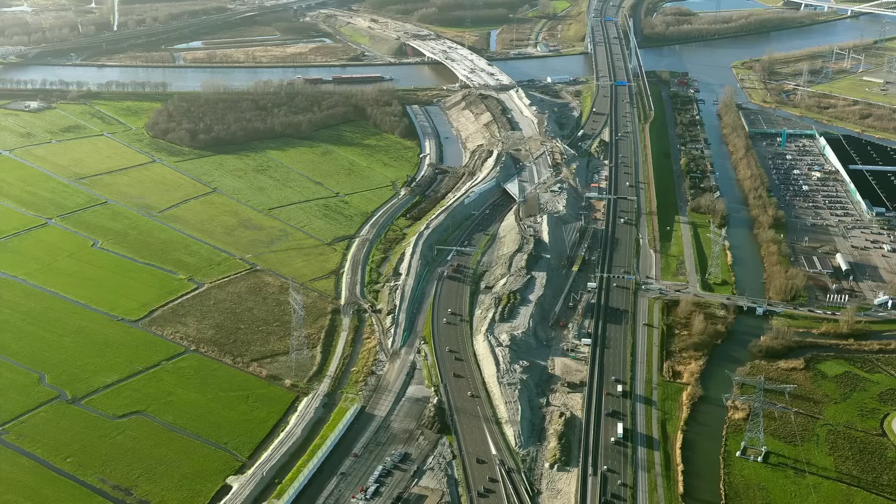We are the Netherlands. We are a car-addicted country. We build motorways, 6 lanes, traffic controlled. We are, just as the US, a car-dominated society. We have to deal with people driving cars. But still, we try to aim to build equitable, livable, and attractive cities for everybody. And when we plan, we try to plan for people, for human beings. And sometimes you have to deal with the fact that they drive cars, even in the Netherlands.

We speak a different language, Dutch, and that makes it easy to do a Google image search. So what I did, I put in the word fietsers, which means cyclists in Dutch. This is what I get if I do a Google image search of fietsers: happy people, upright bikes, enjoying themselves. So when I talk about fietsen in the Netherlands, this is what people have in their minds.

Now I'm going to Germany. Radfahren. I'm getting different images: a more sporty person, a road cyclist, and seniors on e-bikes on holidays. So when I go to Germany, where I also work, when I talk about Radfahren, cycling in German, I have to take into account that my audience has a different image of what I'm trying to convey. Because as a planner, I'm pushing for everyday cycling, for everybody, for the Dutch fietsen.

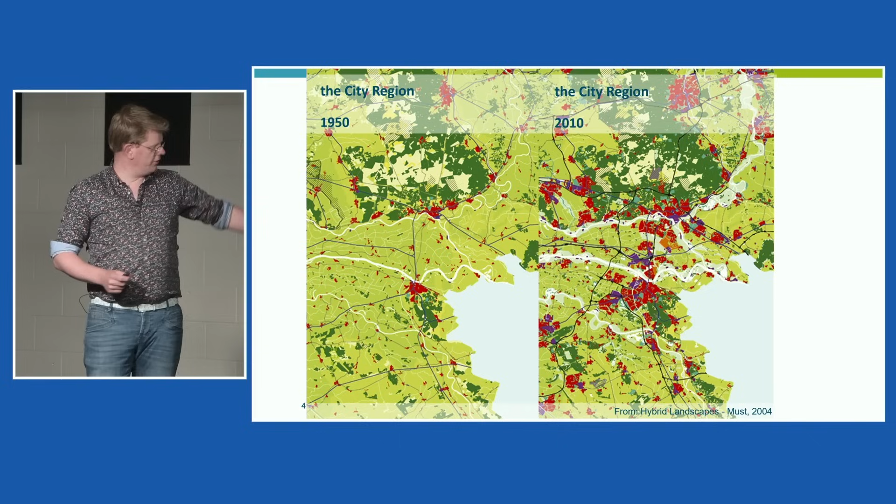One thing. Second thing. I come from the region of Arnhem-Nijmegen. It's in the east of the Netherlands. And you see that urbanization happened. In the south is Nijmegen, that red blob, a Catholic city. North, across the rivers, is Arnhem, a Protestant city.

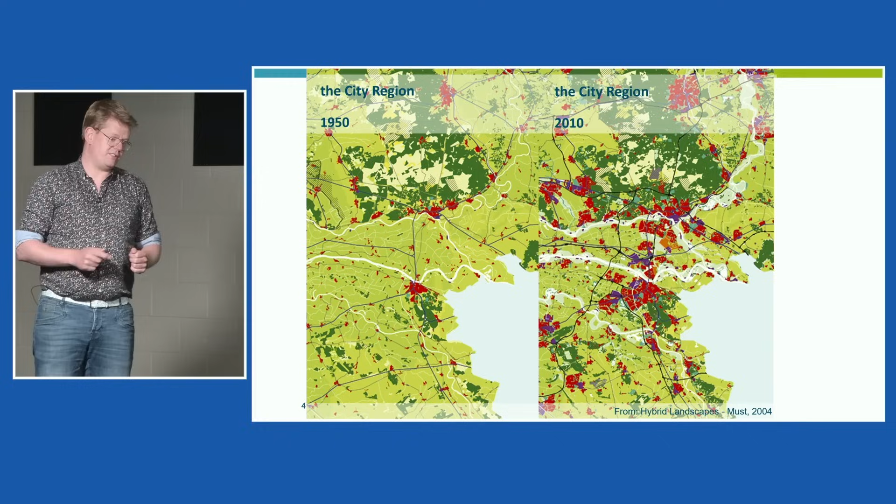I used to work as a civil servant for the region until 2017. And the joke was always that in Nijmegen, the Catholic city, a funeral is more festive than a wedding in Arnhem. There was always competition between the cities. But we had to work together, because what you see is regions grow together, communities grow together, and you want to create connections between those communities to create strong communities.

So we developed a cycling network for the region. And the interesting thing is, we talked through this with politicians, and they said to me, 'What do you want to do?' 'I want to develop this cycling network.' And I said, 'Okay, that's interesting, but that's spaghetti. There's no priority. It's such a lot of things to wish for.'

And one of the things we pushed for in 2008 in the Netherlands, in this region, I said, 'Okay, we're going to focus. We're going to make a few cycling connections really good.' So we said we're going to develop cycling highways, creating connections between cities of such good quality that you really would like to ride there, that you really would like to fiets there, and that they are suitable for everybody, from an 8-year-old to an 80-year-old, from 8 to 80, all ages and abilities.

So we were pushing for fietsen. This is the cycling highway we built. This is relaxed, carefree riding through nice environments. We're looking, even in urban areas, to find spots where it's nice to ride, where you can fiets and can fietsen. It's possible to do road cycling there, fast and quick, that's fine.

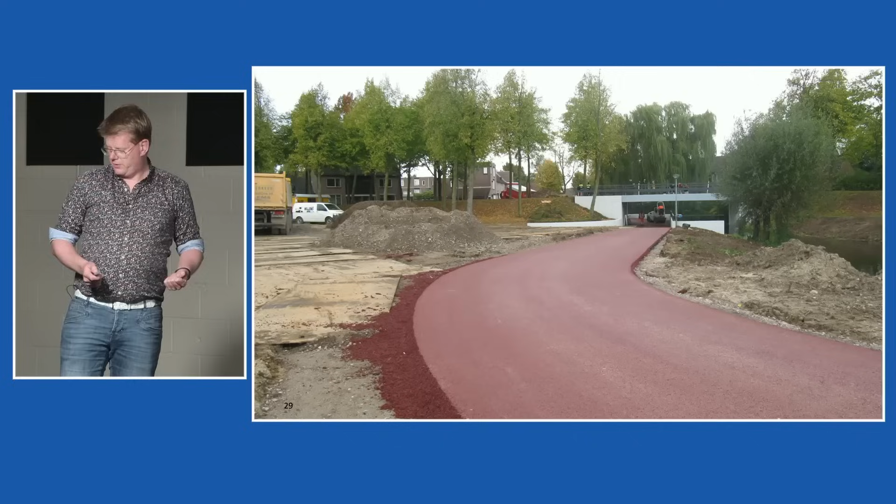It's not attractive for everybody, you're not going there for fun. So when we developed these cycling highways, we also had money for the public space. We also looked at the surroundings, gave the viaduct a bit of paint, new asphalt, and suddenly, hey, these people are my target groups: mothers with children, school kids, and even some illegal use, which is not a problem, because it's utility and recreation on the same route.

And I talked about all ages and abilities, but a good cycling network will get you rolling if you're in a wheelchair as well. In the Netherlands, if you're in a wheelchair, you get electrified wheelchairs, and they use the cycling network to go from their home towards the city or wherever they go. So building good segregated infrastructure is not only for the people who are able to ride a bike, it's really for everybody. That's inclusion.

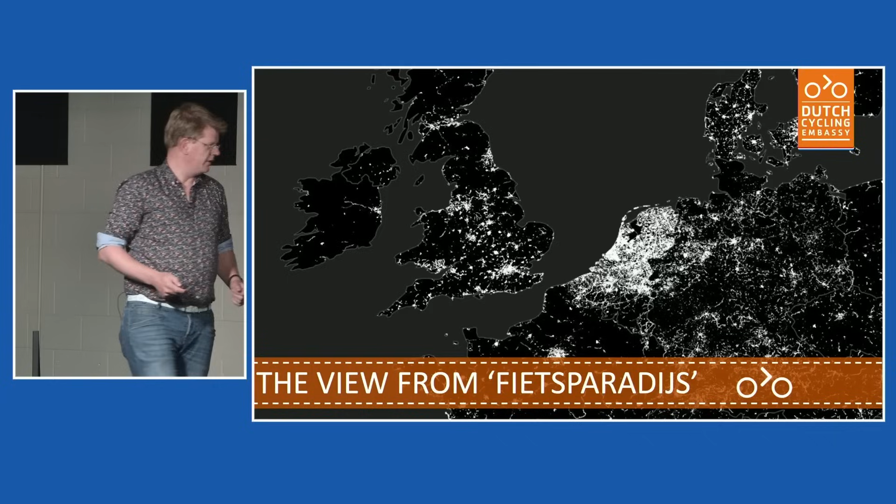So we are a cycling paradise, a fietsparadise, and infrastructure does the job. This is a map of cycling infrastructure, and you can see where the Netherlands is and a bit of Flanders, but it correlates with cycling usage. So you need infrastructure, you need safety.

But how did this happen? Why is the Netherlands so special in this? Well, the Netherlands are special, the Dutch are direct and not very modest, so I'm sorry for that, but this was Amsterdam in the 70s. It almost looks like an American city, although the cars are a bit smaller.

And that caused, at a national level, at a regional level, local levels, we need to change. Car-free Sundays, but then we said, hey, we need to promote cycling, we need to push. Public protest, civil society came up. This year in traffic, 150 people killed per month. Thank you, happy drivers. Irony.

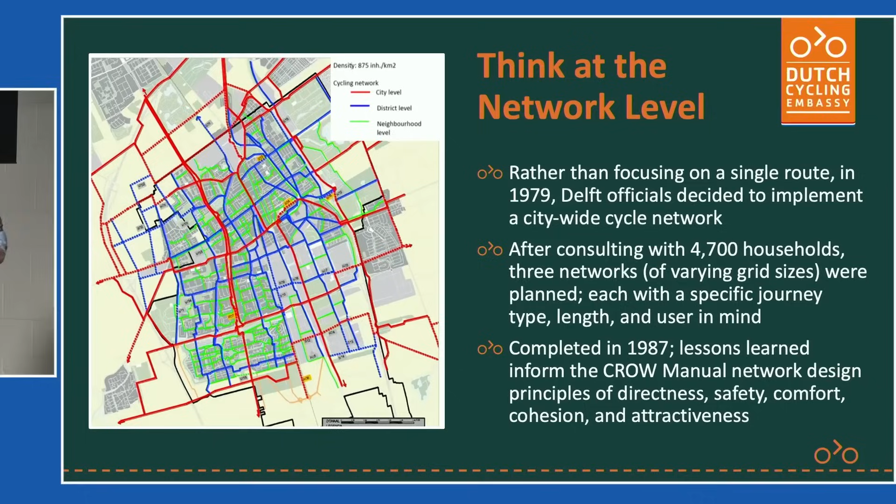It was with business owners, and the street was traffic calmed and made more interesting for cycling. The business owners didn't like it. The politicians didn't talk to them, and what happened is that construction work during the day started, a brick road was laid, and at night, the business owners hired contractors to remove the bricks. Big fights. But we learned from those lessons, and we applied that at the Delft cycling plan.

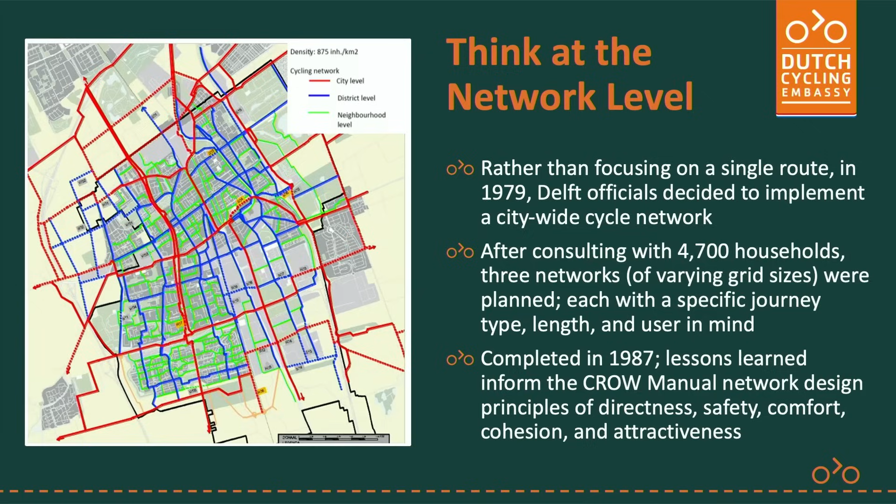And here we go again. Think at the network level. Think, where do people live? Where do they want to go to? Where would people like to ride? This network was designed in the late 70s, and it took a decade or longer to build it. So it's not something for the short haul, working on cycling. It may take a decade or two to become a cycling-friendly city. But if you've got a vision, if you've got a plan, it's possible.

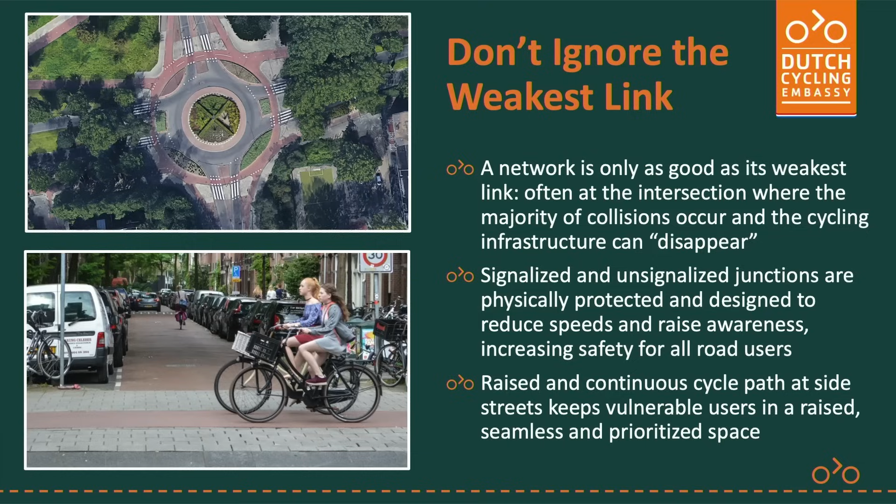But never ignore the weakest link. You can have a beautiful cycling path, which is really nice, goes alongside a river, but if you then hit a major intersection with 6 lanes without anything, nobody will use it. So look at your intersections, and sometimes you have to take drastic decisions, build bridges, underpasses, or close down streets to make it safe for everybody.

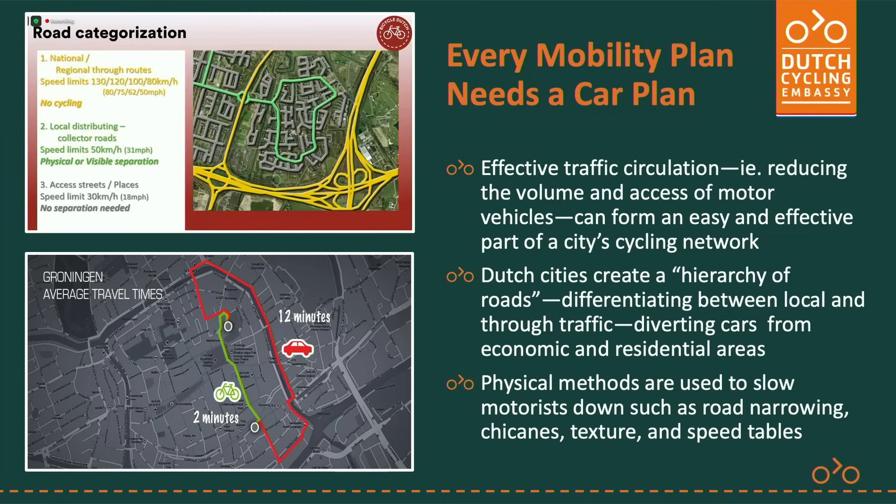And you have to think about the car. Every mobility plan needs a car plan. When you talk about cycling, you need to talk about the car. Like I said, the Netherlands is a car-dominated society, and if I want to make cycling safe, I need to think, what am I going to do with the cars? In the Netherlands, it's politically not possible to say, I want to create a safer cycling network, let's close down the roads, I don't care about people with cars. If you would do that as a politician, that's committing suicide, and you won't get elected. So you have to create a car network and a car plan in order to move the cars to the places you want them, to free up space at places you want for people, pedestrians, and cyclists. How to do it, we'll get to that later.

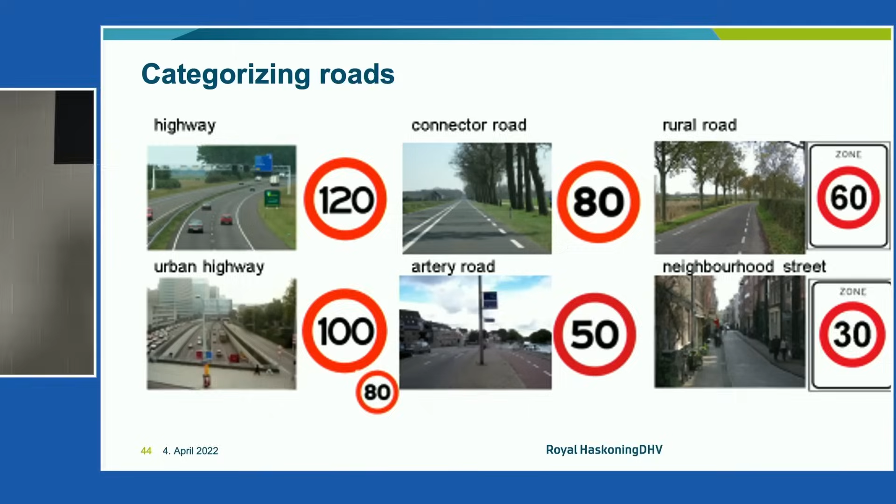What we then do when we talk about the car plan is categorizing roads. Some roads, like the highway, the urban highway, just like the parkway here in Bend, are the main roads for car traffic. We let the cars move and flow, they are the fast roads. They're not suited for cycling, we do not provide cycling facilities there. That's the main network for cars, just a few percent of the roads.

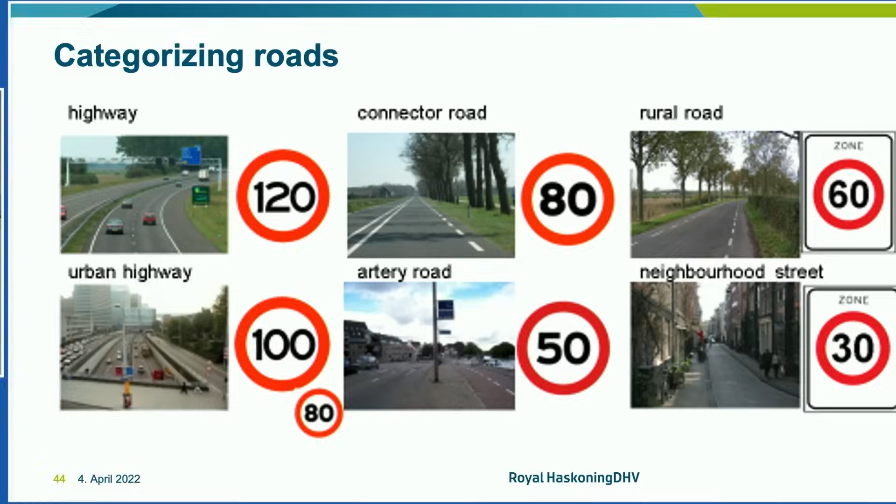In the middle, we have the arterial roads. The speed limits are in kilometers an hour, to be sure it's not miles an hour. So within the city we go, let's say 30 miles an hour max speed on arterial roads. Those roads are designed to let car traffic flow, to be efficient, to handle as much traffic as possible. But the goal is to remove traffic from the neighborhood streets.

I'll show how this works in practice from my hometown, the city of Nijmegen. I live in a city with 180,000 people, a beautiful city I think. Joost lives in Groningen, another beautiful city, he thinks - that's always a discussion. But we've got a main road, built by Napoleon, leading into the city, straight.

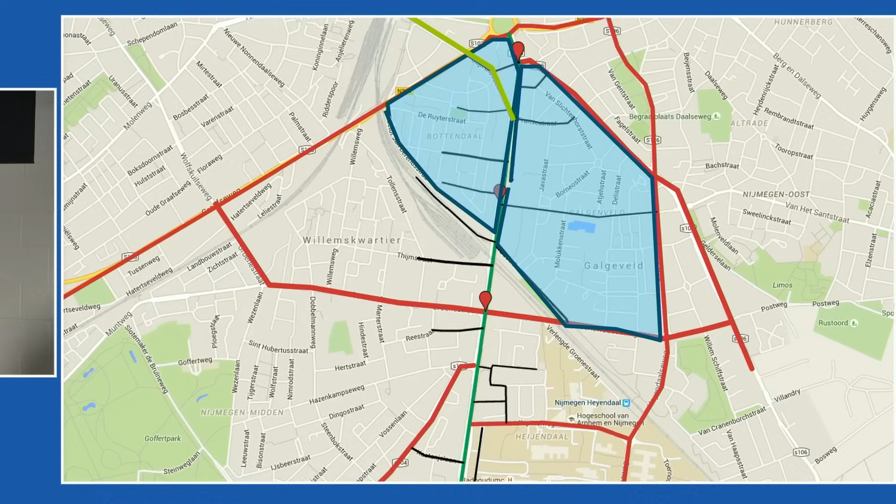And this is an example. In the top left, you see a green line that used to be an arterial road, but we re-evaluated the network and that road has been removed. As you can see, it used to be a main intersection with a lot of space - it almost looks like a US intersection, 4 lanes, a lot of things going on.

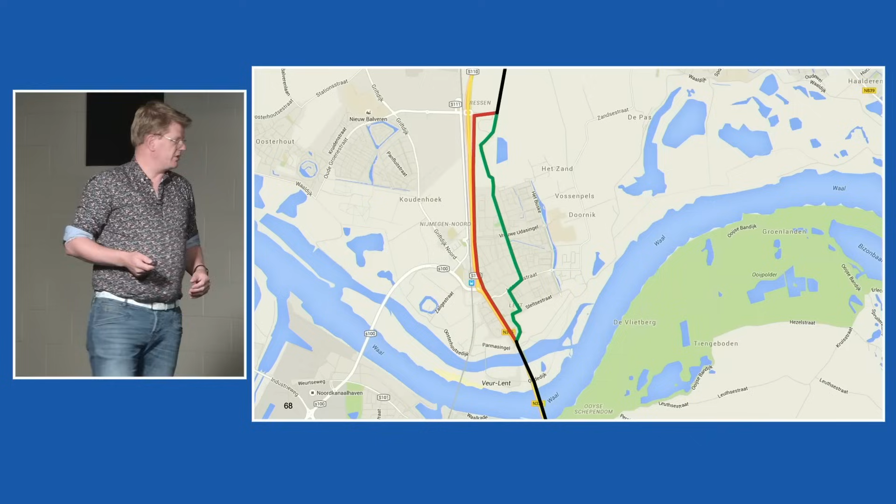But let's get back to cycling, because you also want to cycle in nice areas. When you think on a network level, you can ride alongside arterials, but it's always noisy, there's always pollution, and you're always in the vicinity of a lot of cars.

So you can choose, are you going to ride alongside and develop a cycling route alongside the 6-lane highway, or are we going to ride here? What's better?

So this could be something for 6th Street as a north-south arterial for cycling - reimagine it as a neighborhood street.

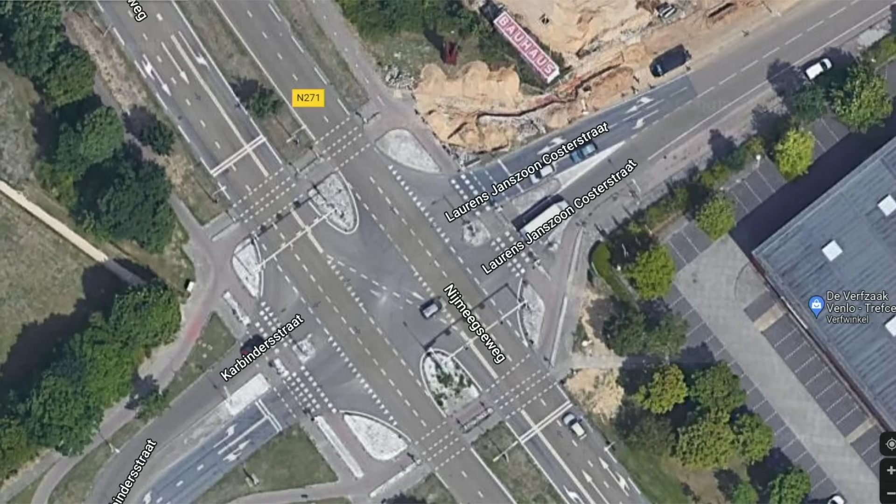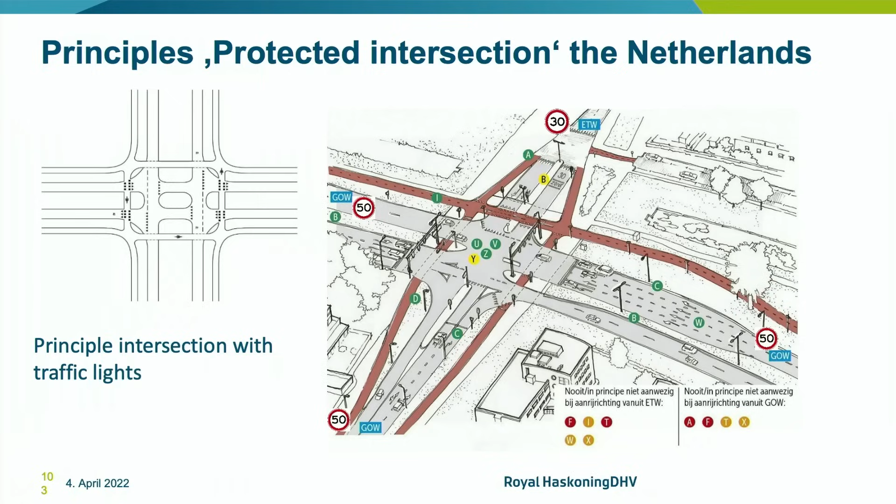But then we go to intersections and intersection design. Going a little bit technical now for a few minutes. We've got loads of intersections in the Netherlands, and in all kinds of forms. But the main thing is that we try to remove cyclists and protect them from turning and moving cars. But yeah, every intersection is different, and as you can see, we do not have grids. So we really try to find the right solution for each different situation.

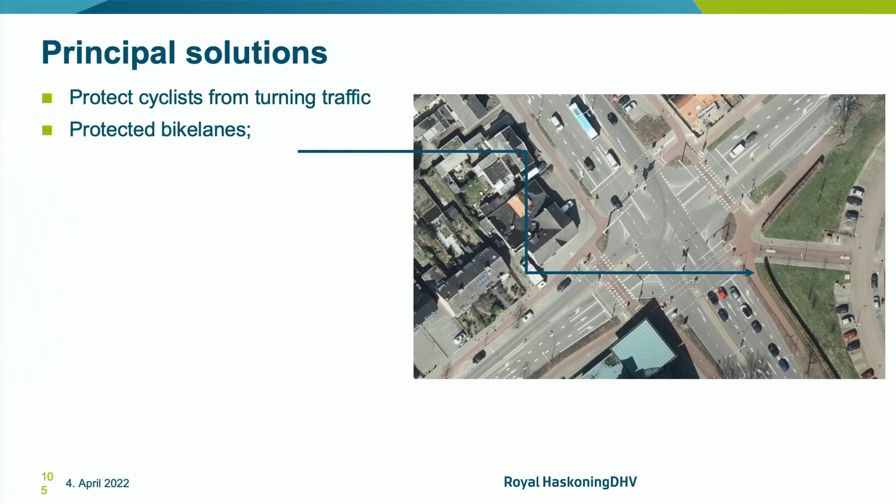So there are a few things we want to implement. We've got a toolkit, a toolbox, where we say if we want to make cycling safer at intersections, there are a few things you can do. The first is, the main thing in protected intersections is protect the cyclist from turning traffic. So create traffic islands, move the cycle path a little bit backwards so that you can wait and never get hit by a truck or a car. Create protected bike lanes.

If you've got the same phase with right turning traffic and ongoing cyclists, make sure that the stopping point is in front of the cars so the car driver sees the cyclist and the cyclist is quickly over the intersection. But even better, let them have their own green phase so you don't have conflicts. Create a traffic island in the middle of the road.

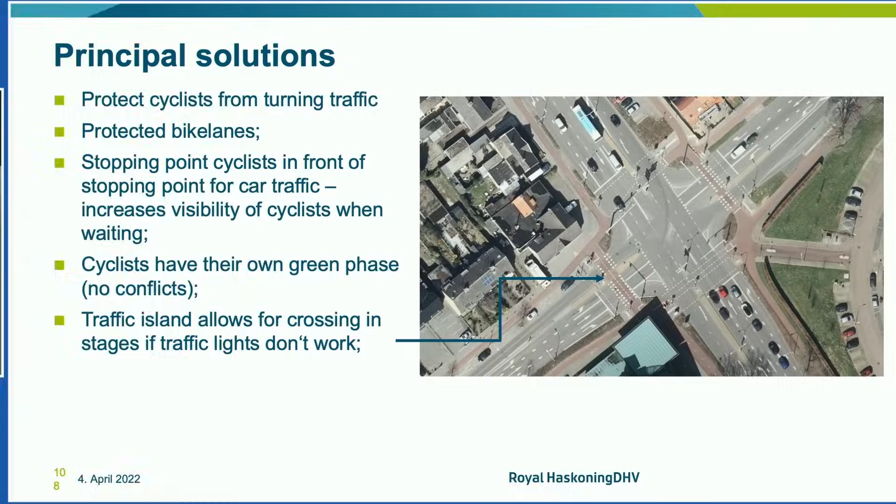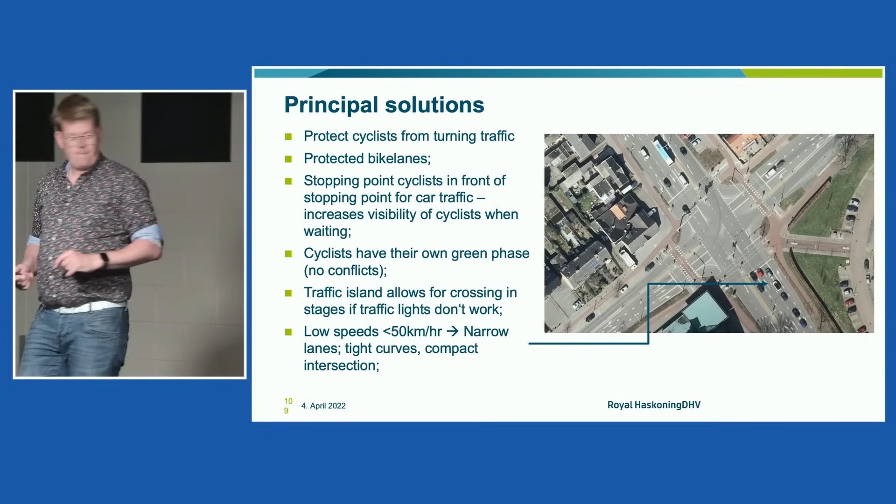Design the intersection so that it's really difficult to speed through. Narrow lanes, tight curves, which also make for a more compact intersection. Keep speeds down, because if something happens then the outcome is less severe.

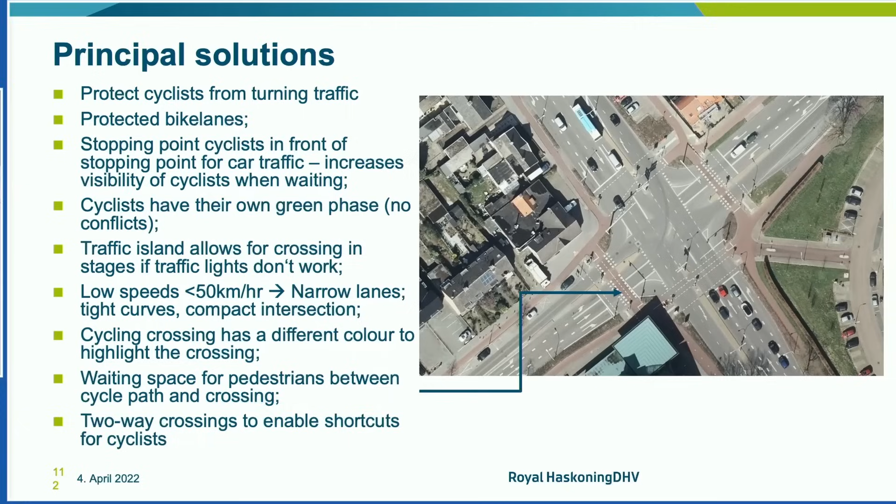And if there is a cycling crossing and cyclists have priority, give them a different color. Create a waiting space for pedestrians. A two-way crossing is a little bit typical. Why is it only on one point? Because on the right, you see a bidirectional cycling path. And if people want to turn left, you either have to do 1, 2, 3 crossings, or you just facilitate an otherwise illegal maneuver, because people will do it. Because nobody will take 3 turns to turn left.

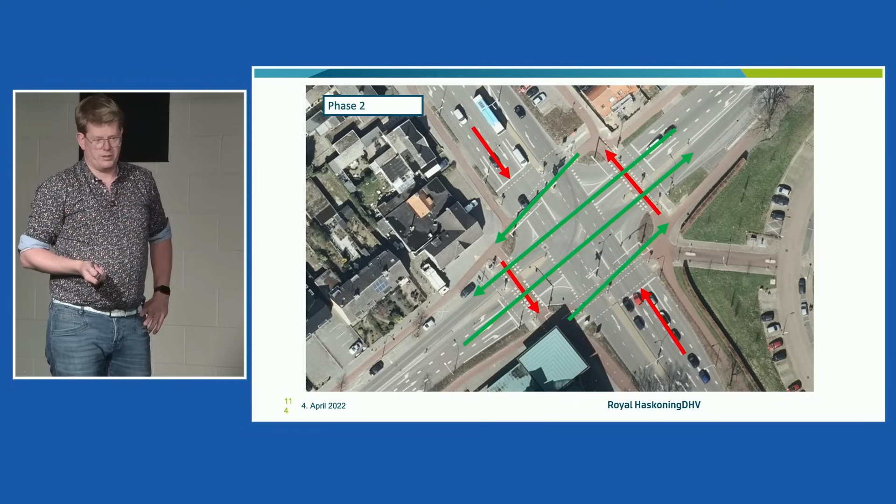And then you're coming about your signal phasing. So if you go phase 1, phase 2, turning traffic, and the other turning traffic, with this you've got an intersection where a car and a cyclist, if everybody sticks to the rules, never meet each other.

Oh wait, I'm pushing the wrong button.

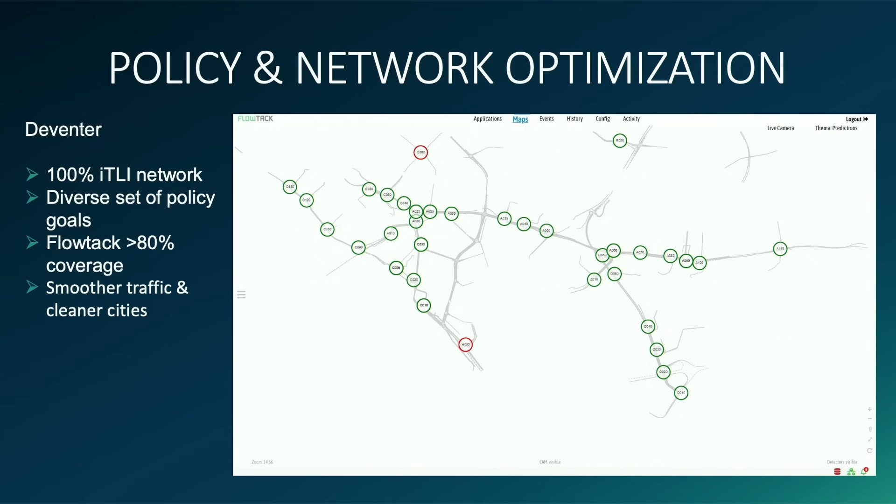And if you do it more efficient, you get results. So in Deventer, we did this, a small city in the Netherlands. And the goals were better throughput, better environment, and better safety.

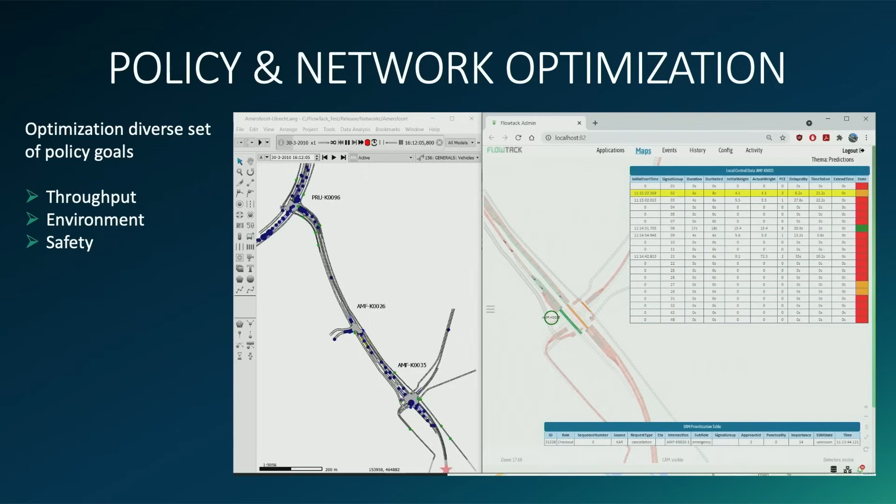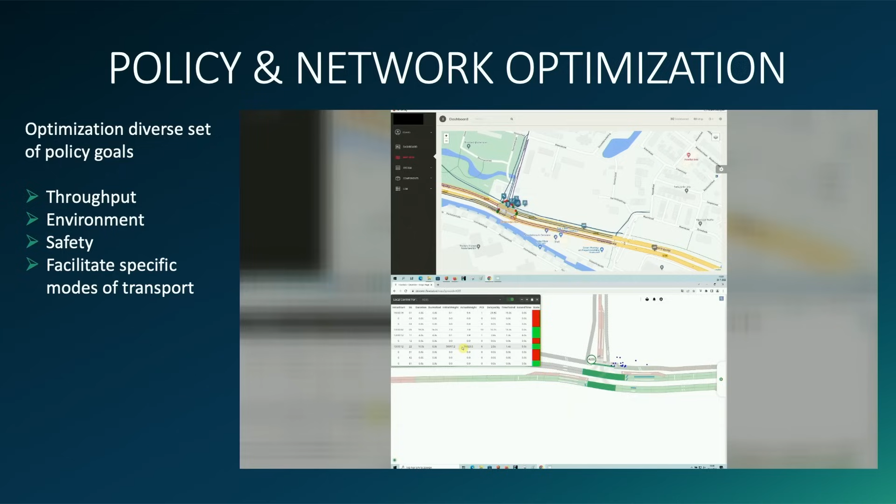If we are able to detect cyclists in this case, cyclists get more points than cars, so they're more important. So here a group of cyclists come, the system detects, hey, it's a group of cyclists, and they get an automatic green light. So you're able to influence the traffic light, and the policymakers are able to say, hey, I want to promote cycling. So if somebody on a bike gets 5 or 10 points, and somebody in a car just gets 1 point, then the system just calculates what's most efficient.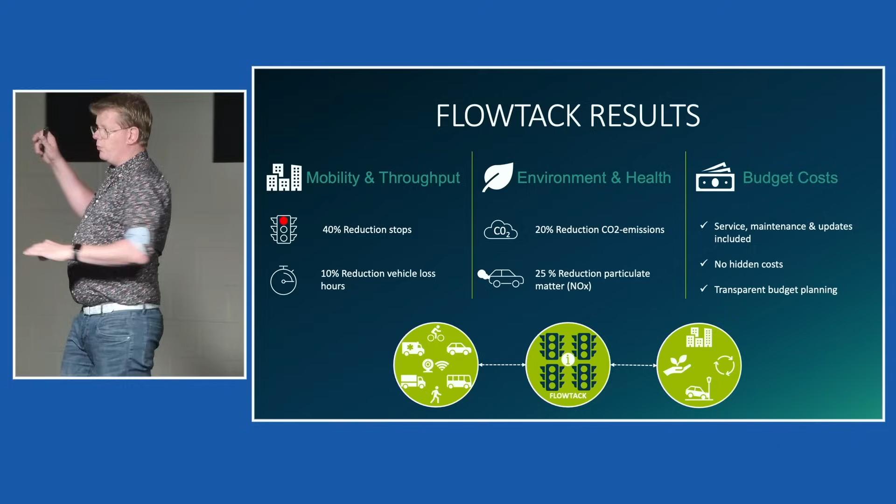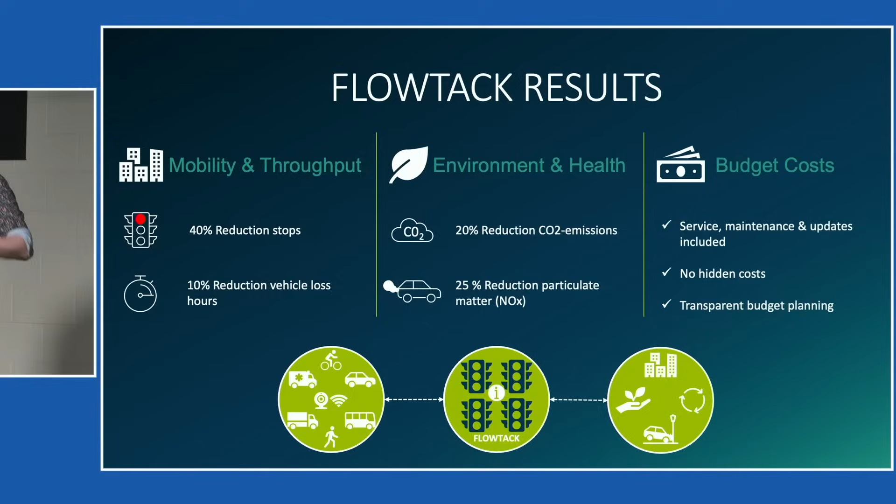Each city where we implement this takes one of two approaches. You can either say we've got a more efficient system, let's get more cars into the city, or you can keep the amount of cars allowed in the city at 100% and give all the capacity gained to cyclists and pedestrians, so they get more or longer green lights. Every city has chosen the latter solution, so even by making it more efficient for cars, it's easier and safer to cross.

A concrete example is this set of intersections, 4 intersections very close to each other on a main road. We used to have 2 lanes on the left going outside of the city, and a cycle path combined with a pedestrian walkway going down, pretty narrow. By optimizing the traffic lights, we could remove 1 outbound travel lane and create a fully segregated cycling facility.

By increasing the efficiency of this intersection, we got rid of the setup where you currently have a cycle lane very close to car traffic, which feels unsafe. We got rid of the car lane, and we're able to get a protected intersection, buffered, pitching in a very tiny bit of green.

At intersections it works once again: right turn for cars gets green. You're fully protected, you can wait relaxed, red for cyclists, and a little bit later we just change it and you will not meet a car.

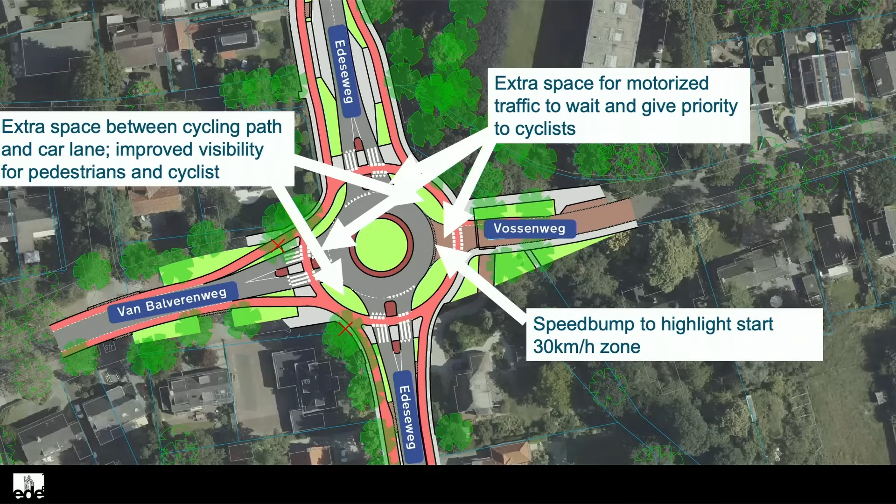So what we do: extra space between the cycling path and the travel lane improves visibility, extra space to wait, and if it's a low traffic zone we signalize it immediately in the roundabout. We can translate and copy this to other countries - we've translated the concept of the Dutch roundabout to the UK and built a UK version of it.

Emergency vehicles - I've heard that in some places they're bigger than in the Netherlands and need space for them. This is the exit of our hospital, loads of ambulances and emergency services come here, and we give them mountable curbs in order to pass traffic. Same on these main roads. The interesting thing is this is really close to the hospital, but because it's safer to narrow down travel lanes and have short crossings, we do not give in - we just build the roundabout like it is. If an emergency vehicle comes, in reality cars are able to move out of the way because speeds are low, and the emergency vehicle goes through.

From a fire point of view, it looks like this: you go over the curbs - oh shit, the car was blocked - so you take the cycling path, the fietspad. You can also use good cycling infrastructure as an emergency vehicle route. You see the cyclists just move away. This is really crucial for the fire department - good cycling infrastructure can help the fire department get around the city. If you're in a car, you're not able to move it, but as a cyclist you are able to move. Over the mountable curbs, the car's waiting, you have to wait a bit to make sure the car sees him, go to the left, and there we go.

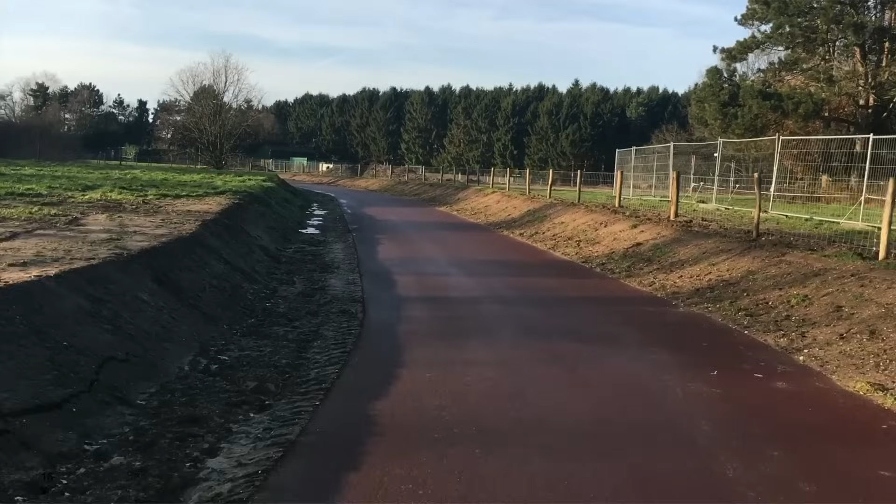Only do that when you expect a lot of cyclists, not if there was one a day, don't do it. But a lot of cyclists come here, so you get priority over car traffic, and in this way we're slowly changing the way people travel. These projects in the Netherlands have led to a big increase in cycling.

And sometimes you hit other things, like a railway track, and you need to build an underpass. You talk for 2 years with the railway operator, and then they allow you to build an underpass in 76 hours.

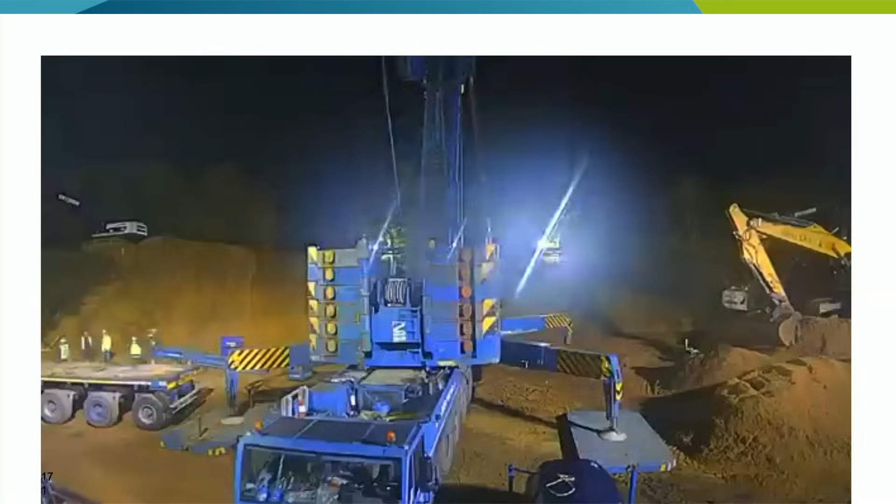It's much cheaper to do this in 76 hours than to keep working with a live railway. But we had to wait 2 years to find the right spot, when there was railway work somewhere else on the track, then we were allowed to do this.

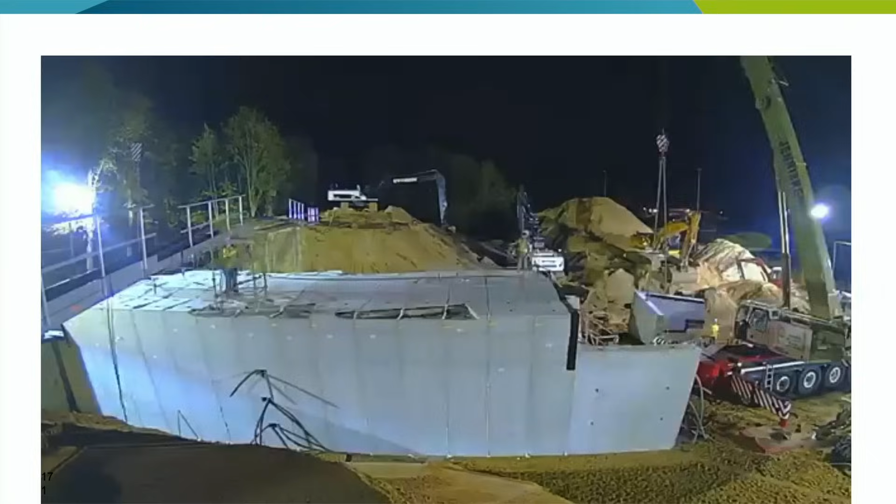But we're now creating connections, connections between communities, just like the Hawthorne Bridge, the pedestrian and cycling bridge, which is in the plans, probably will be as well.

Up, sand comes back, and we're finished.

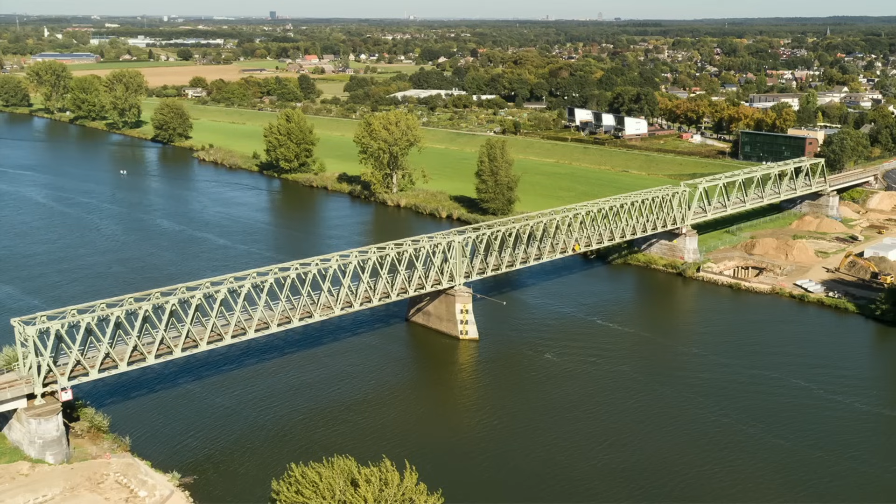And sometimes you have to dream, sometimes you really have to think far. You see here a railway bridge. There is a little town of Cuijk, south of the river, in the province of Noord-Brabant, so a different state. Across the river is the province of Limburg, a second state. And I used to work for the region of Arnhem-Nijmegen, an NPO, located in Gelderland, the third state. So we've got 3 states, a regional office, and 4 municipalities who need to cooperate.

Some people say, yeah, it's not possible. But what I did as planner, I went to my boss and said, hey, if I can make this bridge possible, can I get funding?

If you can do it, you get 3 million. So I went to the state of Noord-Brabant: I've got 3 million euro to make this bridge possible, can you match that? Yeah, we can match it, 3 million. Then I went to Gelderland: I've got 6 million, can you match that? I've got 2, so I've got 8.

I went to the third state and they had only 1 million. I did them last because I knew they were not very cycling friendly. So I had 9 million. I talked to the towns and they had 2 million, so I had 11 million already. Then I got the politicians together: hey, we can build this bridge. It's 17 million euro, we're just lacking 6.

We're almost there. And then they said, okay, let's get working, let's get planning. That was in 2010. This is 2021. We built a bridge, it took 11 years of planning. It started with me meeting a civil servant from across the river in 2010, pitching this idea.

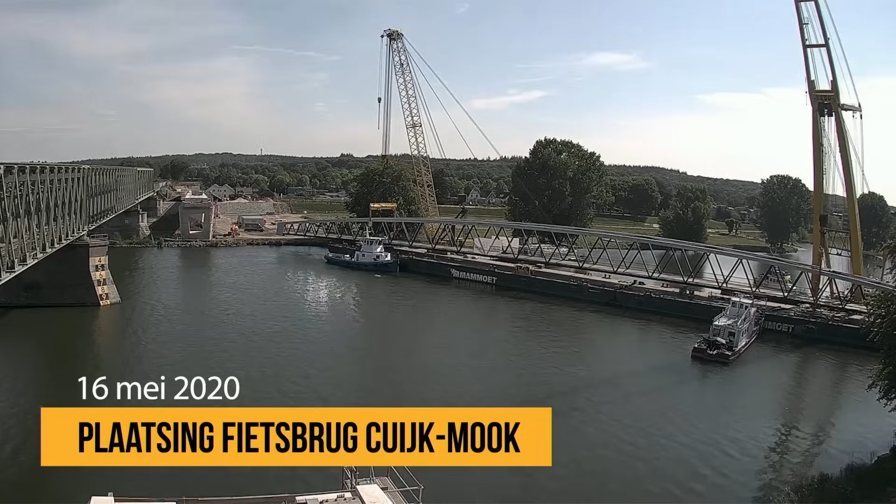Now we've got a bridge which connects communities, which is being used by commuters during the week, but on the weekend it's used by recreational cyclists because they just enjoy riding the Keep on Going route. This is how it looks. We see over 2,000 people a day using this.

We're creating high quality connections which are attractive, fun, and nice to use. This is how you get people riding: avoid hills, go around them. Because the Netherlands are flat, we don't like hills. In reality, we're avoiding that intersection up there, but it's a nice thing to say.

I can tell you, riding in the Netherlands, you've got beautiful weather here this time of year. In the Netherlands, currently I got a text from my girlfriend, it's raining for the whole week. It's cold, 63 degrees in the middle of summer. So we do not have the perfect weather for cycling.

If you ride this path in the morning, you can have a strong headwind. It's 10 miles, and if you're unlucky, in the afternoon you've got a headwind again. It's completely unpredictable. A hill is always there, you know when you're on top of it, and you will get a reward when you go down. Flat country with winds, it's not always the same.

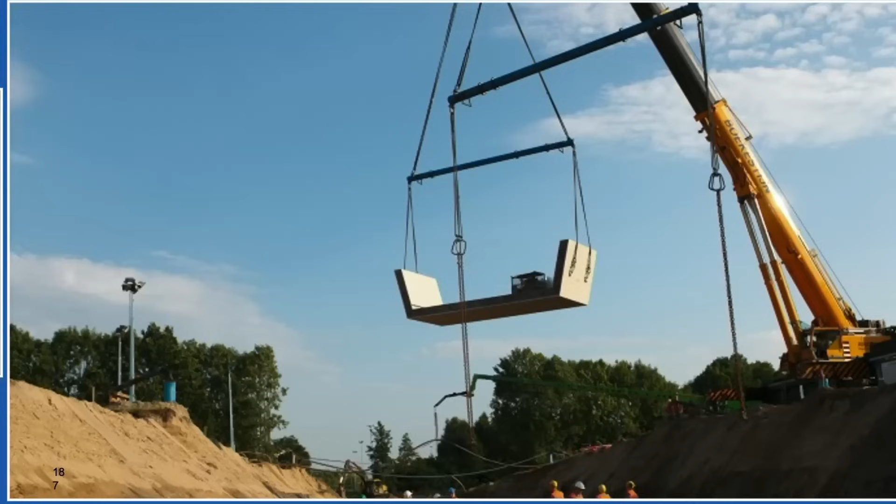So we build projects, look at innovative ways to build them, cool things. But I talked a bit about community, I talked about inclusion, but let's talk a little about politicians. You have to sometimes celebrate politicians, even if they are not your advocates. You sometimes have to give them the spotlight and say, you did a great job. Who knows, if they like it, if they see this turnout for 100 people when they do their work, they think, hey, this is cool, I want more.

So when we open up a cycling project, we celebrate. We have the local mayor, the regional mayor, the state mayor, a few other mayors behind, and we've got our first user, a little boy who was looking at the construction of this tunnel. We celebrate, we give the politicians their prime spot, and if they've got the feeling—my chairman always told me, Sjors, you're working on a cycling project, these are cuddly projects—I like them, because we're building something good, we're building something positive, everybody agrees, let's build more.

Because he always had troubles with highways, with the bus, or with finances, so he had so much difficult things to do. But the cycling projects, he loved them, and he wanted more because they just went well. Celebrate them, celebrate with school kids because they are going to use it, celebrate with your community, with Bike Bend.

Honor your advocates. That guy on the right, he was a pain in the ass. We were developing a cycling highway, and he was criticizing me. It wasn't that I wasn't doing it good enough, it was, yeah, it can be better, you need to build an extra underpass and even more and more. We're talking about a cycling highway in the Netherlands, one of the famous cycling highways, the Rijnwaalpad. And he was not happy.

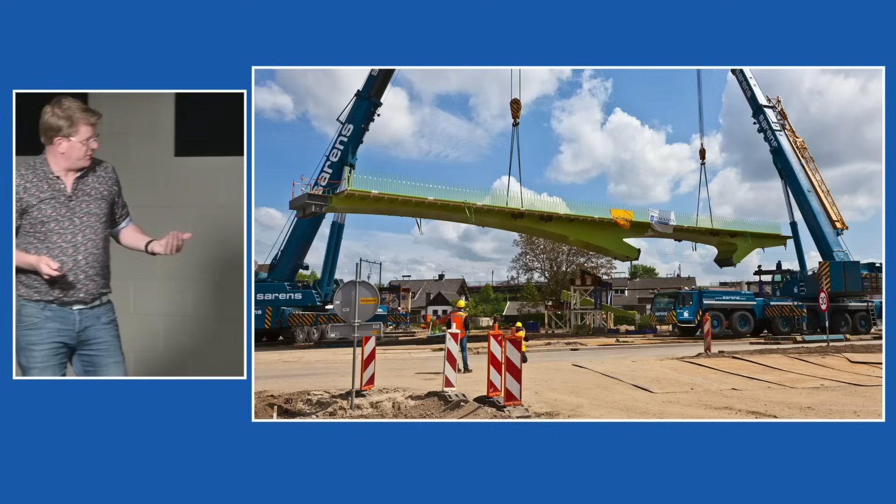And you're laughing, but this matters. This matters about how you feel. You build beautiful projects, great cycling bridges.

Cycling bridge? Nah, this is a car bridge. It's also, once again, reimagining the story. This bridge is being used by 6,000 annoying cyclists a day, maybe 7,000. They block traffic if we would have a traffic light. So they would block traffic flow for the 40,000 cars below. If we had a traffic light, those cars would have to wait 30 seconds per car. 40,000 cars, 20,000 minutes of lost time because of those annoying cyclists.

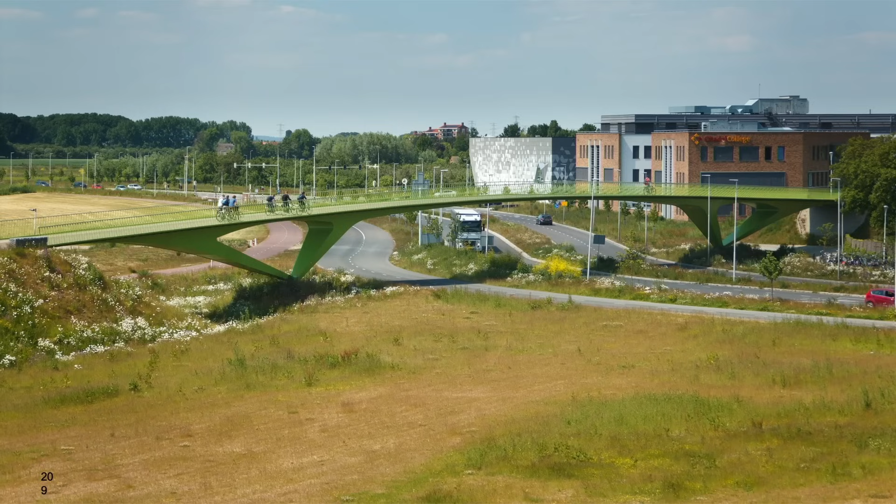So we got money for this bridge, not on the premise that it improves cycling. We got money because it improves the flow of traffic. I don't care where the money comes from, because in the end, these people are using it. That's what happens. So we built nice infrastructure for fietsers.

But when I talked about fietsers, I also talked about a mental map. Fietsers and cyclists, you probably all know where the good trails and roads are. But the car drivers don't. And we need to get the car drivers on board and turn them into fietsers.

So we look at marketing, we look at imaging, and when we developed the Rijnwaalpad, the cycling highway, we developed an app that gave information. The cool thing is, in that underpass, you could control the lights with the app. If you would start riding for the first time, you could pick two colors, pink and green. And if you would go to the tunnel, it would light up in your own color.

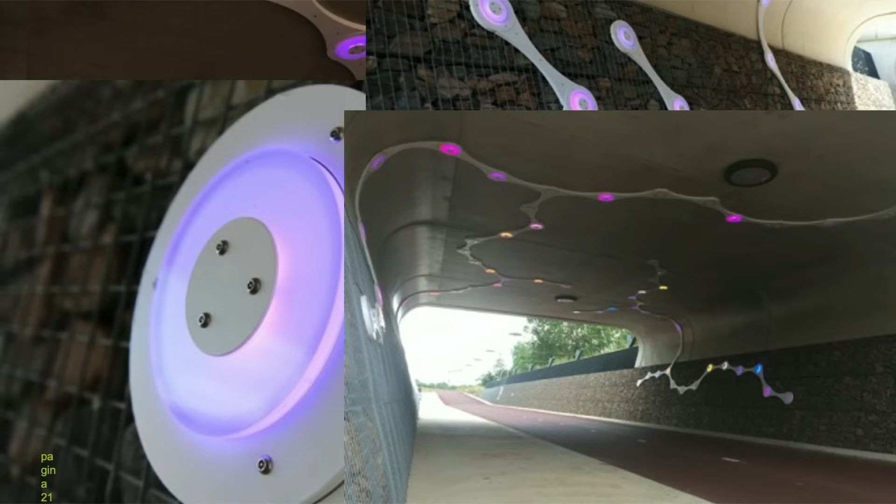If you would ride more often, you would unlock more colors, and you could pick the color you like, yellow, red, whatever. It worked. Sometimes it didn't. If you would go through and it would show another color, you would get a message: you're not riding often enough, somebody else has more credits, so they got their color. This all worked, but I'm speaking in the past tense.

The reason why we discontinued the app is that we forgot one basic thing. Fietsen is not a thing you do out of sport or because it's special. No, it's a mode of transportation. It's a utilitarian thing. You just do it. You get on your bike, you ride, you get off, and you go do stuff. You don't think about it. You don't want to activate an app to control the lighting. People didn't use it. That's what we forgot. But still, good story.

What did work is the brand, the logo. It's a bit extreme, I must admit. But going to Nijmegen, it lights up yellow. It's a bicycle chain, and we put these on light posts on the cycling highway. Going to Arnhem, it's pink. But I'm really sure that there's not a single car driver, the target group, who does not know that there's an alternative. These lights are marketing.

If I launch a new product, like a new brand of Coca-Cola or whatever, there's a marketing budget of so high. We launched a new product, which is the cycling highway, the Keep on Going route, between Arnhem and Nijmegen, and we had 6% to do marketing and promotion of the project. Out of that 6%, we were able to build these lights.

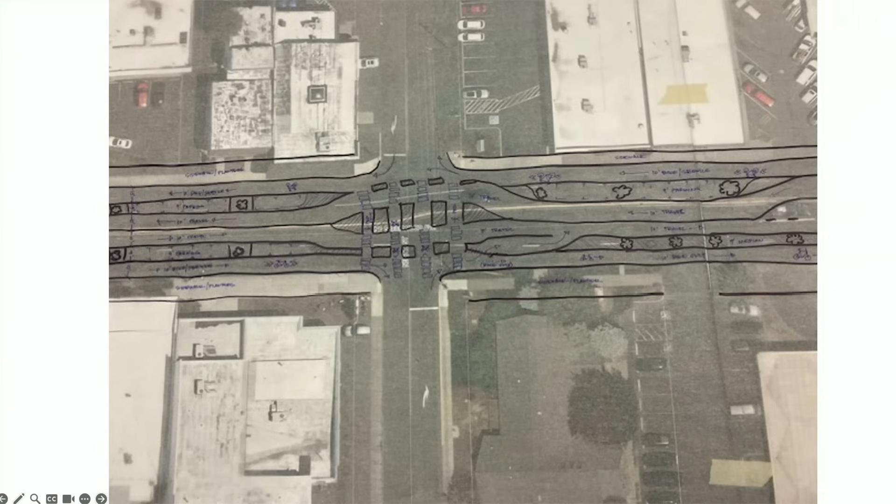As mentioned, we got into that space where we were trying to look at some of these more complicated intersections. I believe this one is 2nd and Greenwood. Anyone who tried to get here tonight knows there's a big giant barrier down the middle of that thing. So this was really trying to explore how can we move cars more efficiently through this space, how can we do it with fewer lanes, because in the right-of-way, every foot matters. So what we were really trying to figure out is if we can get more efficient with where the cars are, can we make room for better bike ped facilities, fully separated bike ped facilities in the right-of-way? So this is one of those concepts.

Another one of our groups really dove in specifically on 2nd Street and the intersection at Hawthorne. What we ended up doing is spending quite a bit of time on 3rd and Hawthorne, because I hear this sometimes: we don't want Hawthorne to be a bridge to nowhere. Hawthorne Bridge is something incredibly exciting that we all know in this community, and Landwatch is really proud to have been part of working with the city, the chamber, and all of you to get tremendous federal and state funding to match our local funding to make the bridge happen. But it's just a piece of a much bigger puzzle.

And that bigger picture is Drake to Juniper. That's what we've talked about, connecting Drake Park all the way to Juniper. We pushed it a little further in this workshop and said, you know what, it actually should be Pilot Butte. So Pilot Butte to Drake, because if we can get to Pilot Butte, then we're getting to the Larkspur Trail. So it was really exciting stuff. If you can't tell, it was a lot of energy, a lot of excitement.

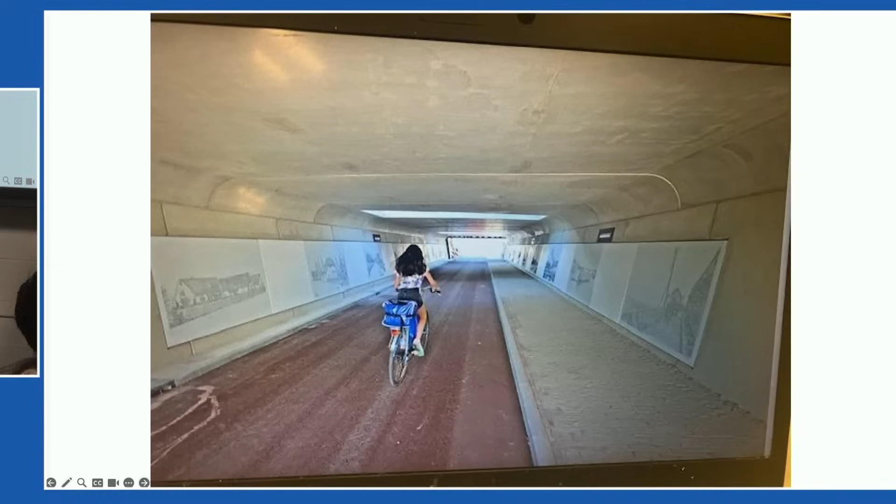But one of the things we talked about was an undercrossing at 3rd and Hawthorne, and we had a great team to help us think through this. Here's an example from the Netherlands, kind of a big park-like, wider setting - about 25 feet on the top, so wider on the top, narrower on the bottom, to make this a really great thoroughfare you can see all the way through. Here's what it would look like to travel through a tunnel like that, with clear lines of sight. You can see there's daylighting in the middle of the tunnel - that's natural daylighting. That was something we were really interested in exploring.

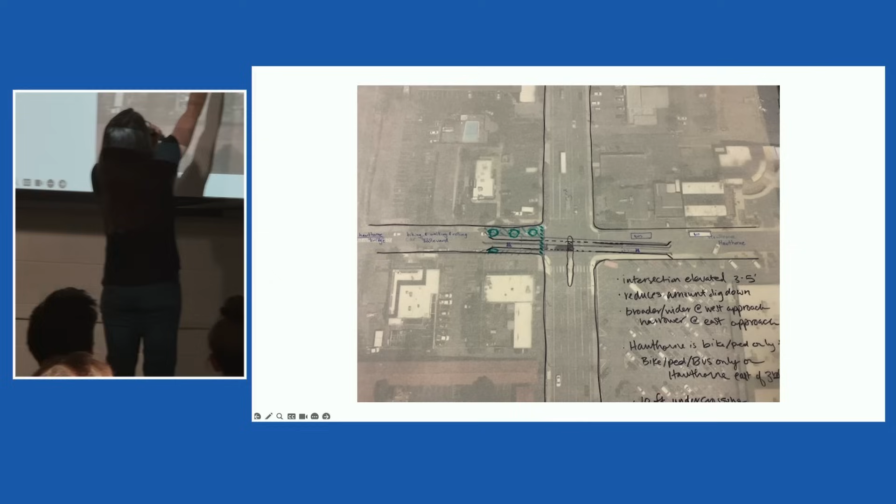And then you pop out on the other end in a more narrow space, because that would allow us to pop out essentially on Hawthorne, where the current bus station is, if we really want that to be a mobility hub with an increased transit system, trying to figure out how we could get buses moving through there too. Again, these renderings don't do it justice, but essentially what you're seeing here is that wider entry going under 3rd, popping out here on Hawthorne in a narrow fashion. This is a median in the middle on the upper surface of the road, and that hash mark is the daylighting, a place where we can allow natural light in. We're pretty excited to explore that and see how it could work.

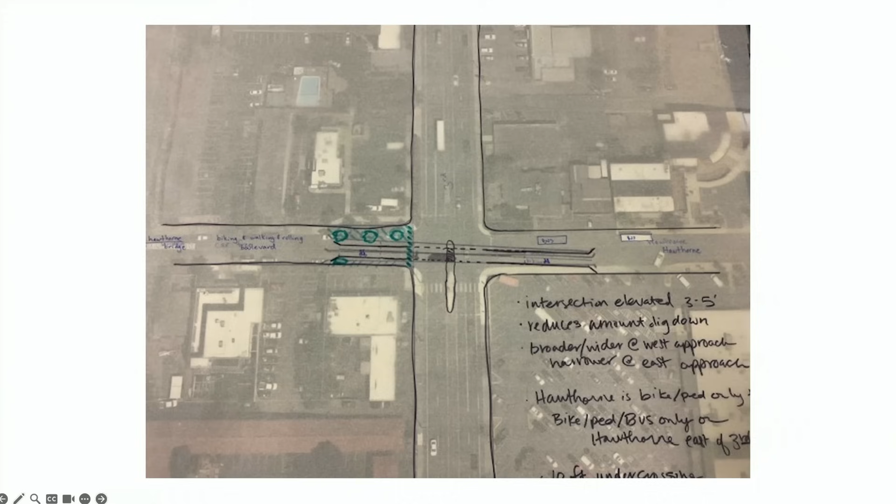The other thing - if you've ever stood on Hawthorne and looked up towards 3rd, you know there's a natural increase in the grade there. So something we talked about was bringing the grade up, elevating this intersection 3 to 5 feet - nothing crazy, just a little. What that does is it means you don't have to dig down as far. And we all know in Bend, with lava and basalt, you don't get down very far before you hit that. So the less we can dig, the cheaper delivering a piece of infrastructure like this would be. So that was one we definitely wanted to highlight here. Let's see what else.

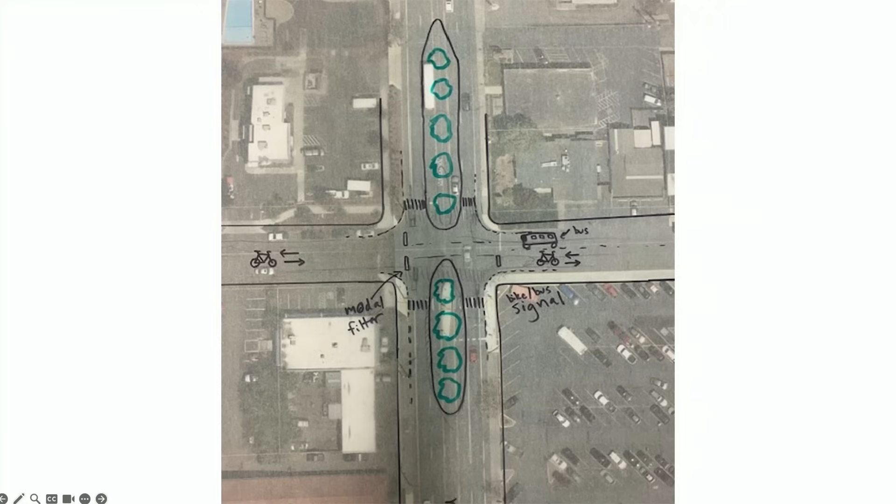If we can't have the undercrossing, we have another idea. This one was really about trying to limit car access on Hawthorne and make this a bike-ped focused place with buses there by the Hawthorne station. So what you're seeing here are these big planted medians, which are taking 3rd down to a single lane of traffic moving in each direction, so that as a pedestrian you have a safer and more narrow crossing that's protected. We also have some of those modal filters we've talked about that make sure bikes can move through, while allowing mobility for the bus to turn right and left via a bike and bus signal. So those are some of the ideas we were exploring for 3rd and Hawthorne.

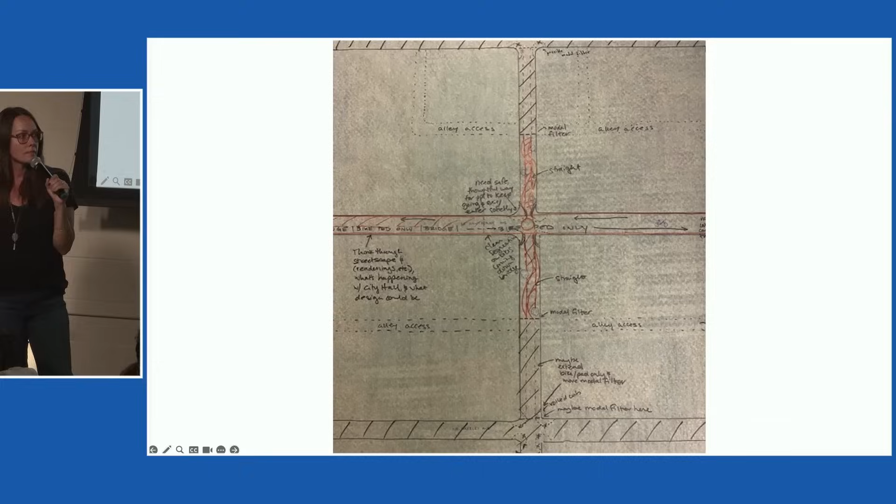How am I doing on time, James? All right, give me 2 more minutes. I'll go quick, I promise.

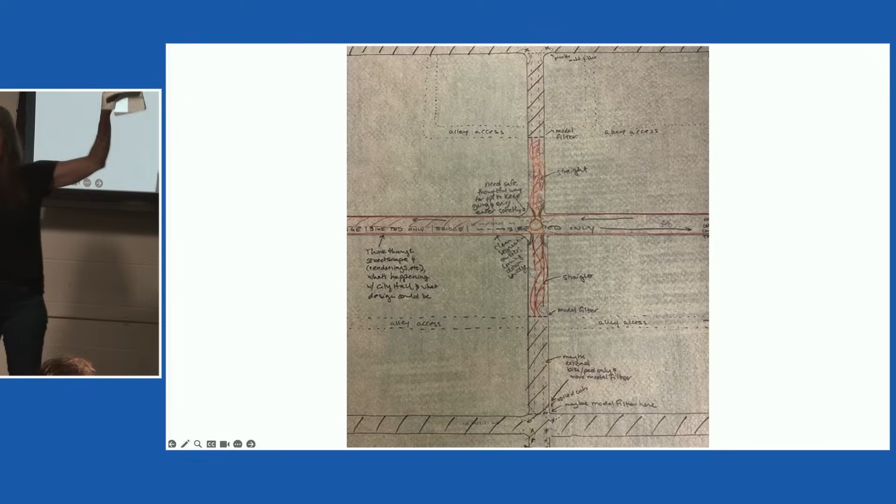Okay, so this is 2nd and Hawthorne. There's lots of things we could highlight, but essentially what we're seeing here is trying to extend the network of car-free zone around Hawthorne. What we discovered is that what we were excited about in this design is that this is 2nd, right? And 2nd is at the heart of the BCD, the heart of our city. So this is a nice solution because it really creates some great spaces for bike-peds only, but it also allows for the slow, safe flow of cars in the space to find parking and be in the district and circulate through.

So we had a few different ideas: moving a modal filter kind of mid-block so that a car entering here could flow through the alley access, or closer to the intersection so that they're flowing through this way on a more main street. I'm sure there's more I could say, but we're just going to haul through this.

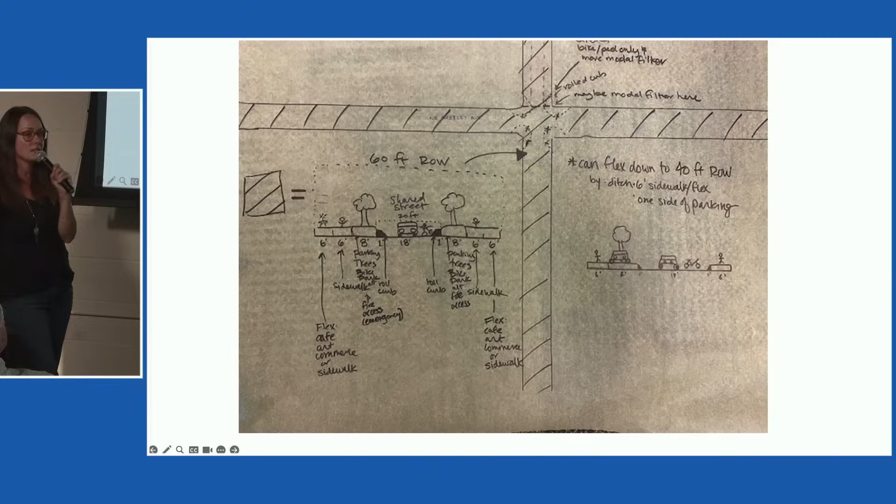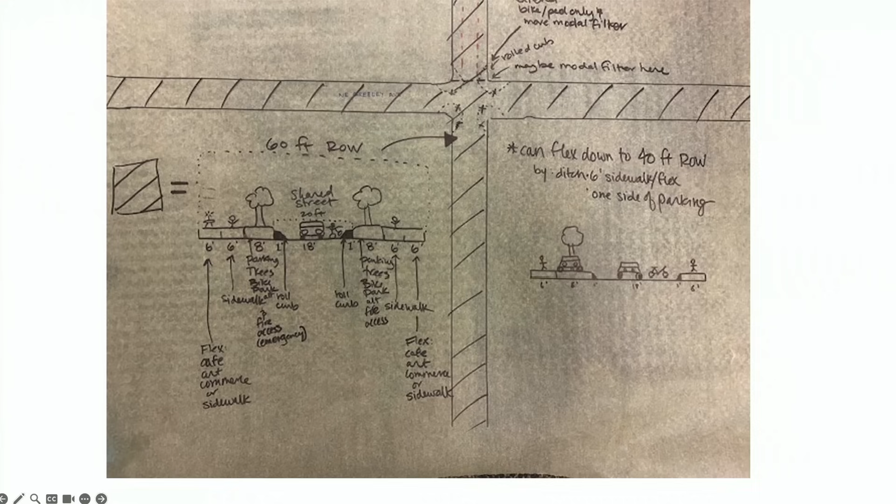Here's a cross-section of what we're hoping to see in all of the streets in the BCD, the Bend Central District. I think folks know the vision of our community is this is a more dense, mixed-use, vibrant, redeveloped area. This is a concept we really hope can be applied not only to 2nd Street, but to all of the streets in the district that are meant to calm traffic and have these streets tell the story we heard about tonight: that this is a place where we go slow, where we share the road, where everybody is moving safely.

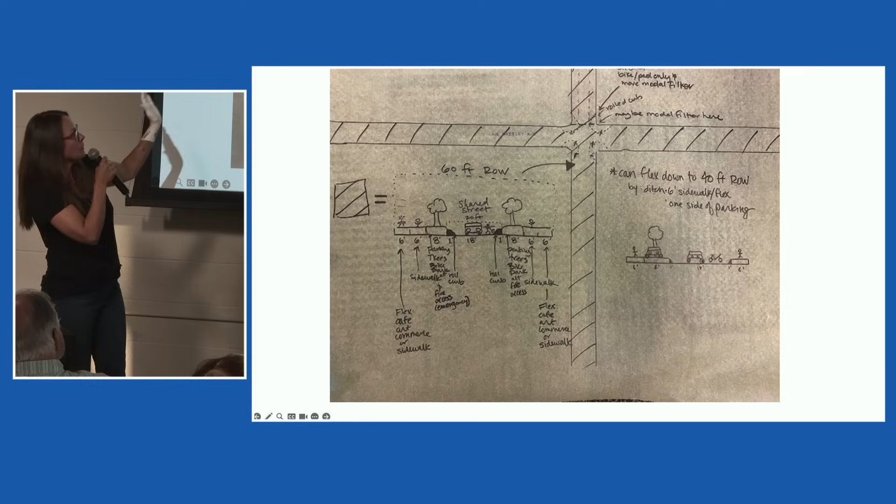So we have an 18-foot road there in the middle that's shared, bikes and cars, a foot on either side of a rolled curb that allows for 20 feet essentially, and that is a wide enough road for emergency access. The next piece out is 8 feet. We had envisioned alternating parking, trees, bike parking, and also additional fire access or emergency space. The next segment out on either side is the sidewalk, and then we had this extra 6 feet to play with for flex area - cafes, art, commerce, or just an open sidewalk.

This was the final group, and they really dove deep and got really into it. This was a group of a lot of engineers - you can't tell. So this was... they did great.

So this is 2nd and Franklin. Again, really trying to figure out how can we take what we have and move cars more efficiently, and if we can do that, then what does that create space for us? What else can we fit in here that's going to be great for bikes and peds?

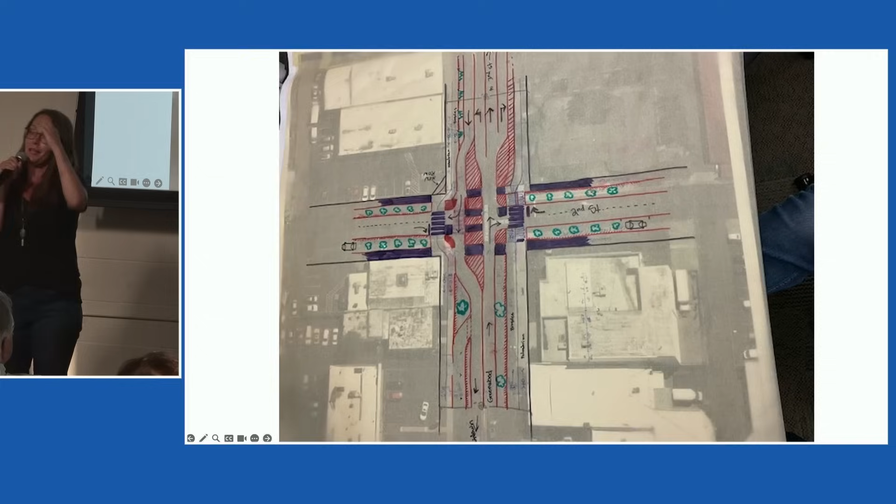I'm going to kind of skip through this one because I think one of the big takeaways was the next one. So they did Greenwood and 2nd. They spent almost a day and a half on this design. They did this one in 20 minutes. So I think it's one of those things where, having spent the time, the good thinking was tough, but if we have a model, we have something we can be applying to other intersections, and looking for these solutions can come much easier once we have the language and know how to do it.

So I have a few key takeaways to share, but maybe I'll go after you, or what do you think? Okay, so we mentioned Hawthorne as being this bigger piece of the puzzle.

There are a few other aha moments that I wanted to share for this group. One is Hawthorne Bridge. There are a lot of ideas about what it can be.

We've talked about a park, we've talked about plazas, and I think a big aha moment for us today and in the last couple of days was that if we want this to be a bike highway, our keep-going route, we're gonna have to think about how some of those other important needs are met elsewhere in the Bend Central District. It can be beautiful, it can be amazing, but it really needs to serve people who are using it as their main transit option.

So I'm gonna put that out there. I think the other aha for us was around looking at Franklin and Third. I didn't show an image for that one, it was a really tough problem for us to grapple with. I think the reason is that when we talk about one piece of this puzzle, it inevitably connects to all these other threads.

So we started talking about Third Street. Third Street is our north-south, it is our main way of moving cars through our city. And we all know how much of a pain it is to move a car down Third.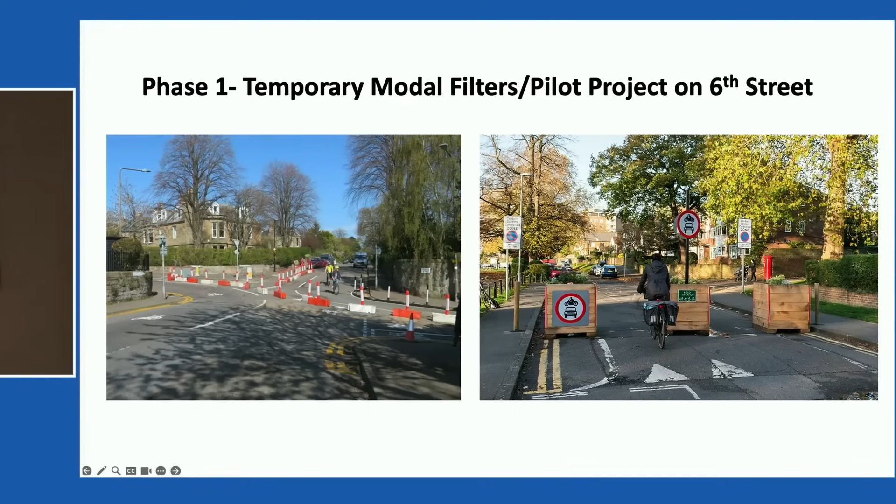But why would we actually choose to use 6th Street versus 8th Street, or go down to 4th or 3rd? Kind of what Sjors is saying is separate users—how do we not have everyone exiting onto or getting onto 8th Street all the time?

We want the flow of 8th Street, but how do we also push cars out to 8th Street and away from 6th Street, and make 6th Street that continuous path?

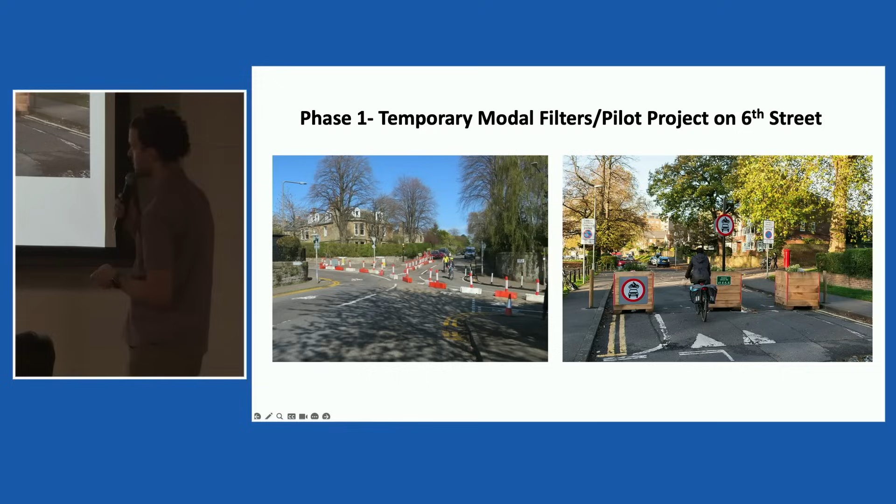I think a lot of the ideas centered around these modal filters, and there are a few different levels of filtering that I'll just flip through here.

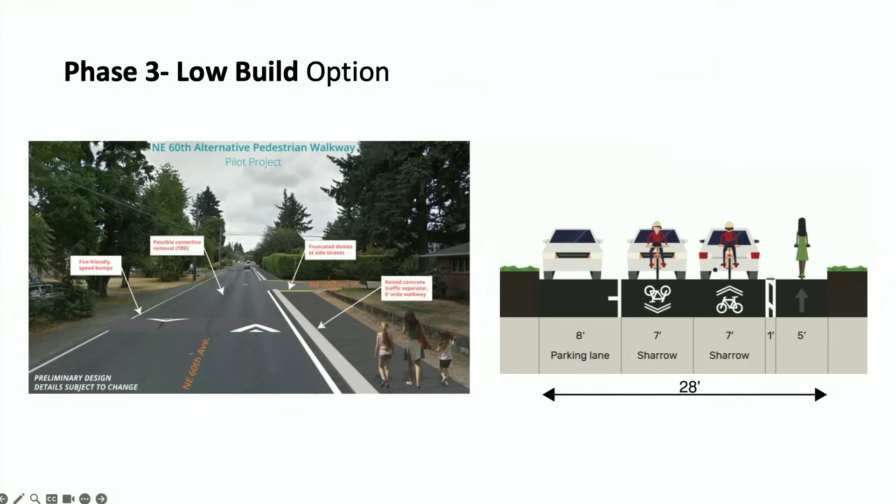I think this was more of a traffic calming measure. This would be maybe at Revere or Olney.

So, giving people parking, sharing the space, chicanes, filtering at Olney or Revere.

Greenwood and 6th is a step up from what it used to be, but if you've ever biked through there, it's extremely awkward to get that button and get through. As I understand it, we have a lot of good people at ODOT pulling for us, we just needed a little more community support.

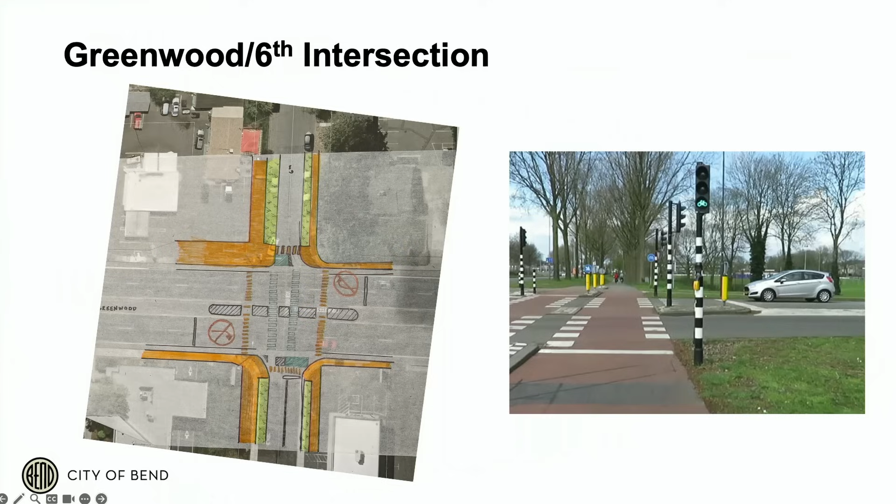Yeah, another idea for 6th Street—I think Sjors mentioned this—cars can still drive through here, it's just not very comfortable.

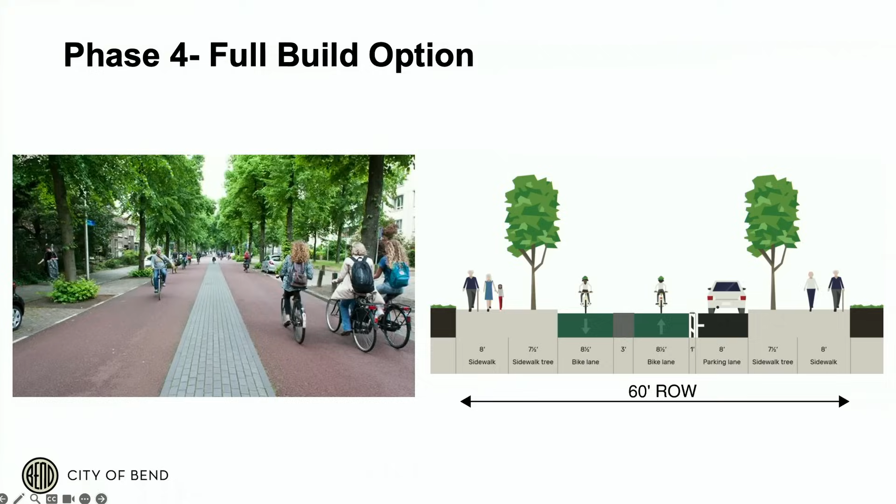So Boyd Acres, Butler Market, there was outreach here recently and the city has this in their queue. So it was fun to work on this one.

And I have to be honest, I even challenged whether this was a good one to do a workshop on, because I was very skeptical.

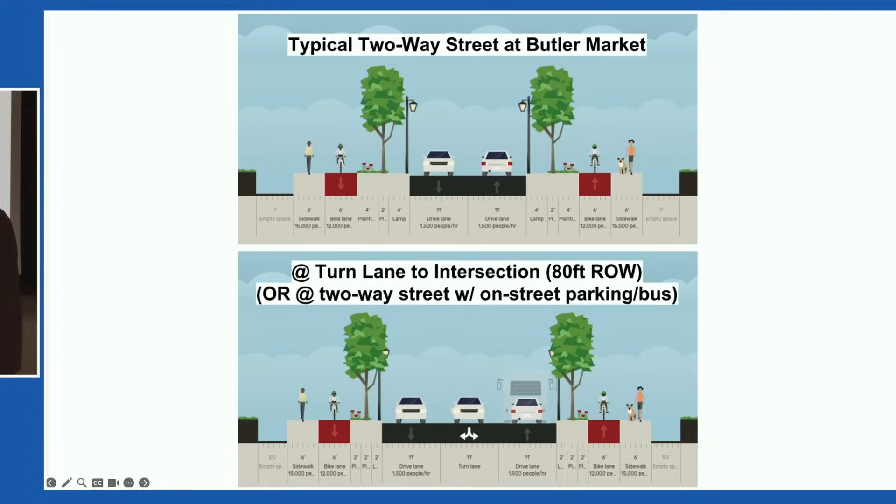This was on Butler. We had an 80-foot right-of-way, and the typical drive aisle, we can go down to 2 lanes. They actually restriped this last week and have already done it with paint. We can take our cycle track, do the grade-separated track next to the sidewalk, have trees, which are crucial, and we still have 7 feet on each side that we don't need. So it does fit. And when we go to the intersections, we do need this turn lane to make the intersections work, and we lose a few feet, but there's still plenty of room.

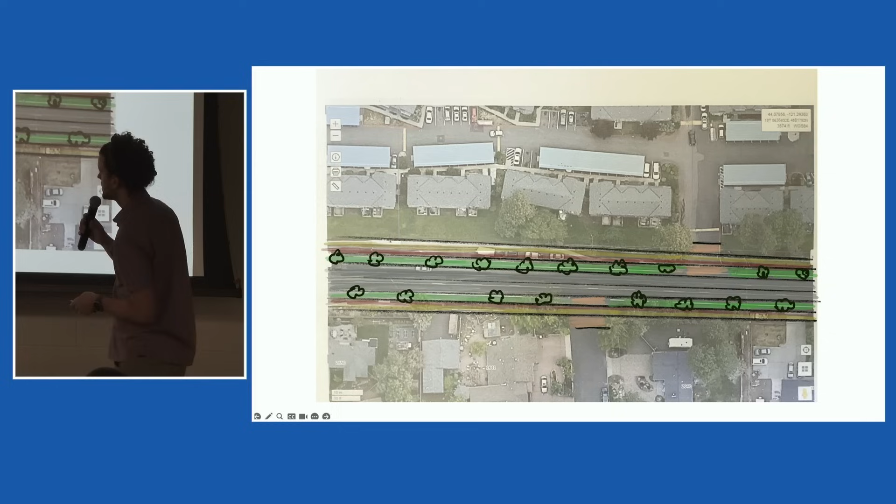So this was a plan view, a typical plan view of Butler. Sidewalk, cycle track, greenery, trees, 2 lanes, raised crossings at all of the neighborhood inlets or businesses.

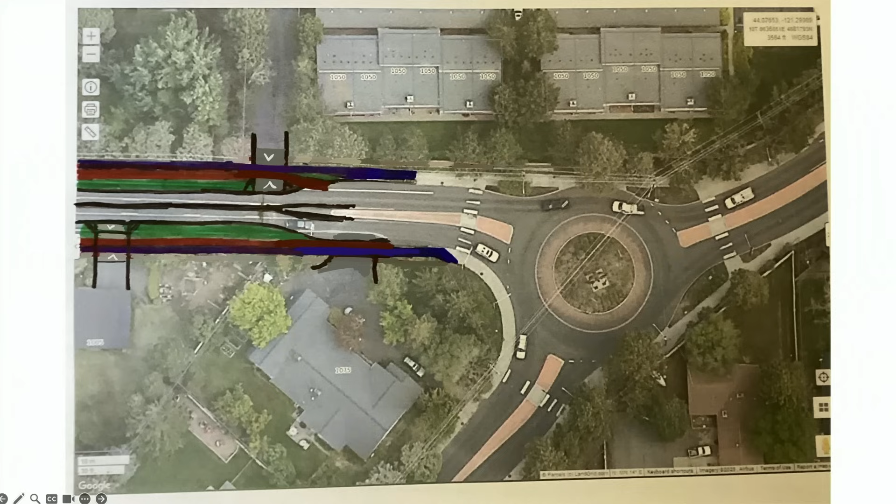Really the same thing. This one kind of ties into the next slide in that we don't have funds to do this everywhere, so how do we tie this into our existing infrastructure? We just tried to really think through what that would look like. Maybe in the future this roundabout could get an upgrade, I'm not sure.

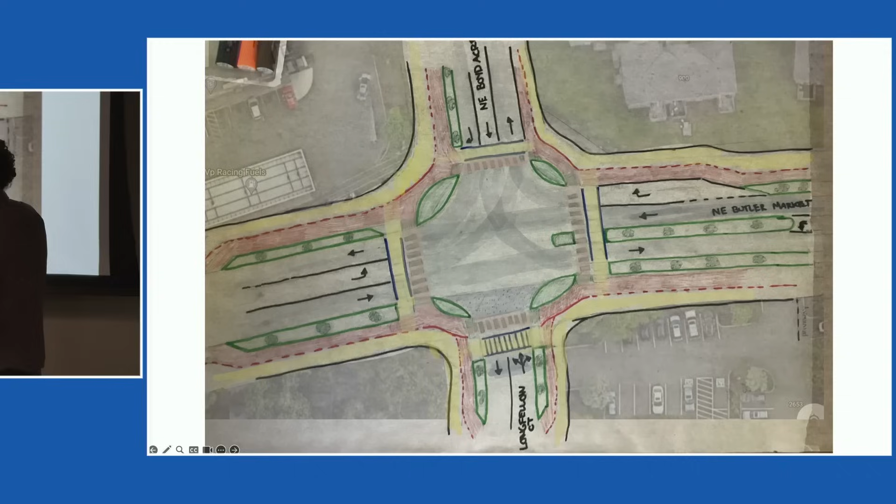The actual intersection itself, we explored the protected intersection option, knowing that we need a lot of turns to Boyd from each way, and that into the neighborhood not so much. So we can do a raised crossing here.

On the other side of the intersection to the west, we realize we need to transition back to our existing infrastructure because we don't have the funds to do everything. So this is showing this grade-separated cycle track ramping down into the bike lane on the street. You can kind of see that in section here.

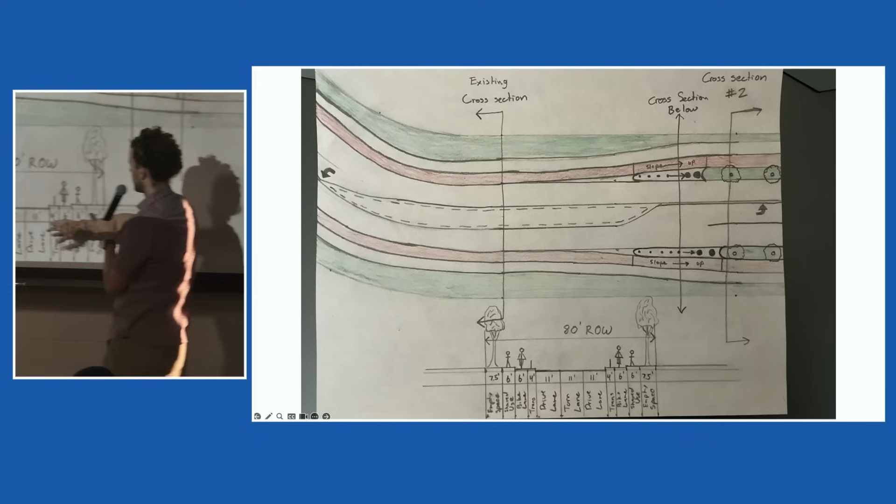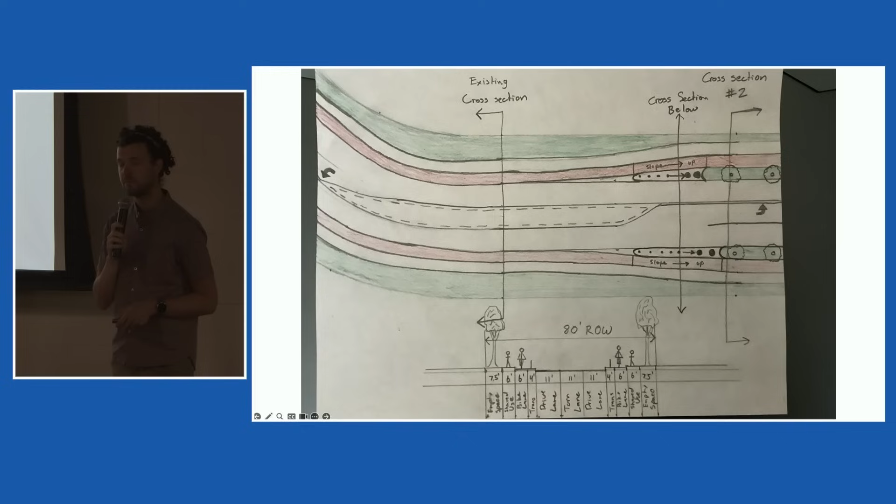In terms of hooking our populace and letting them really feel the benefit of changes that have been funded or queued up for funding, when we mix and match our existing infrastructure, which kind of sucks, with this glorious, amazing grade-separated bike lanes, how do we give people enough of a taste of the good life before we have to integrate with existing infrastructure? Is there enough swappage to really make it so you're like, oh, this is amazing, let's do more of this, and then, oh yeah, we really need to change this? Is there enough of that from both a car and a bike rider standpoint to really get some of that momentum going?

In my opinion, if we could have one of these in Bend, it would be something we could talk about, we could experience it. There are people resistant to these ideas, but if they can experience them, the conversation goes a lot farther. When you just see drawings on a page or talk about research, it's not as good as experiencing it. So I don't know the answer to your question, but I'll take one block of this any day.

We also got to explore the roundabout option, which was quite fun. We would definitely be exceeding property lines, but not interrupting businesses—maybe some parking is lost, a couple parking spaces. So difficult, but very possible. This is Butler Market, Boyd, and the neighborhood to the Greenway.

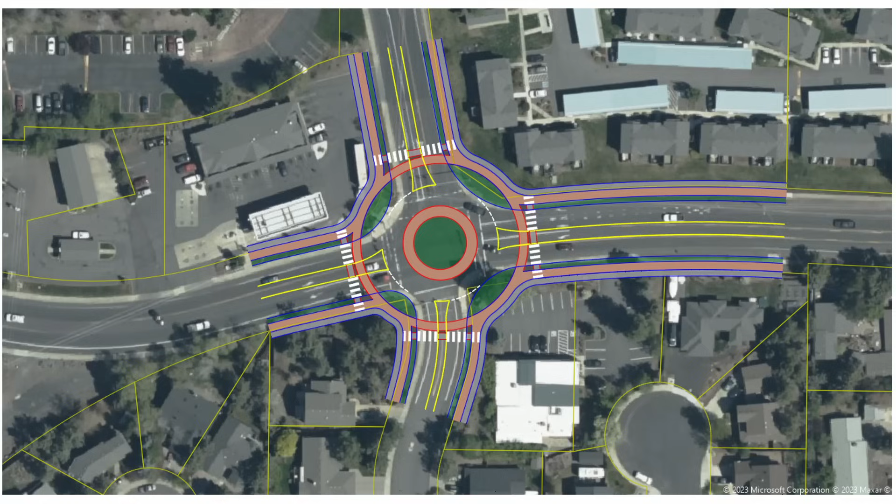Sjors mentioned it, but the circular cycle track allows this—what's going on here? If a car is taking a right and the bike is going straight, they're at a 90 degree angle, so they can make eye contact and negotiate who is going to go. We actually did a few roundabouts, and there's one up on the left here. I tried to cut out some slides, but definitely look at that one, it's really cool.